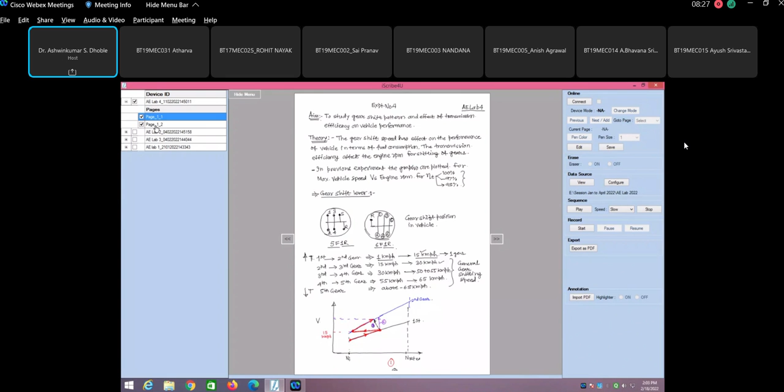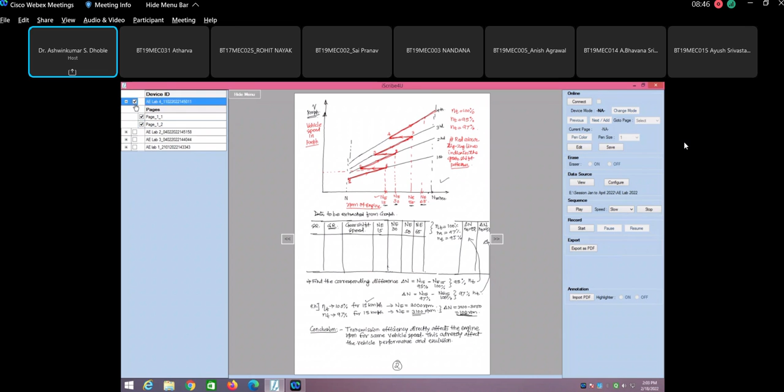So in the last practical we have seen the effect of transmission efficiency related to the engine RPM. There we found out what is that delta NE, which I asked you to calculate. This delta NE for 95% is more compared to 97%. That means that much amount of additional RPM we have to run the vehicle to get the speed we desire.

So now today's practical is based upon complete machine design. So have you studied machine design by any chance? Have you studied shaft design, experiment number 5? Yes sir, we have studied it. Very good, because that knowledge is going to be required here for designing the shaft.

So here we are going to design today's AE Lab 5, experiment number 5. The aim of the experiment is to design the input, to design the gearbox input shaft. So we have to design, let us say, if we see the theory...

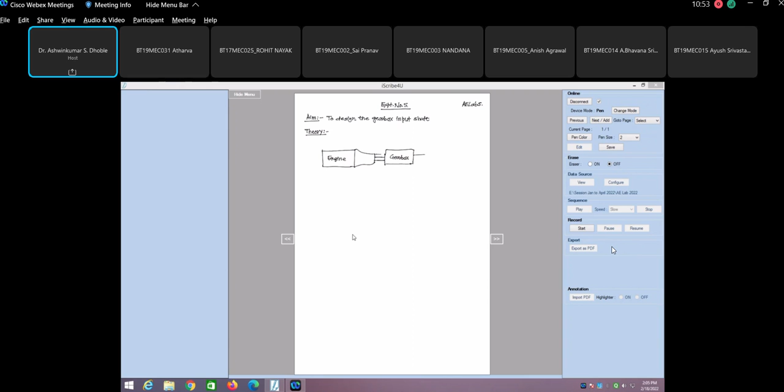We know that we are going to have the engine here. So this is the engine. Now this is the clutch housing, and this is connected to the gearbox. From the gearbox this can go to the propeller, then propeller to differential, and differential to wheel. So this is basically the gearbox input shaft. We have to determine the size of this. This is called the clutch housing. This is differential, this is propeller shaft.

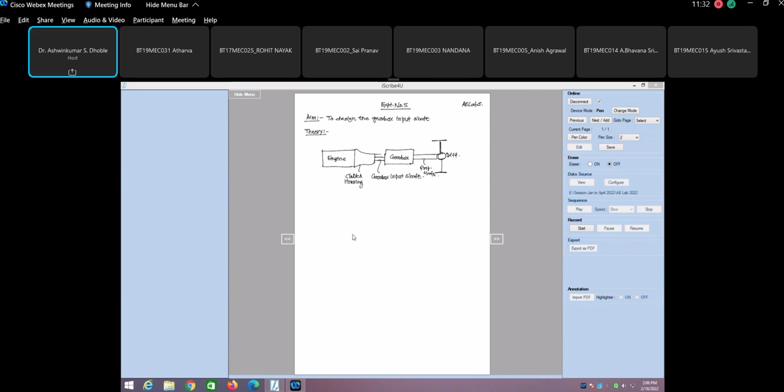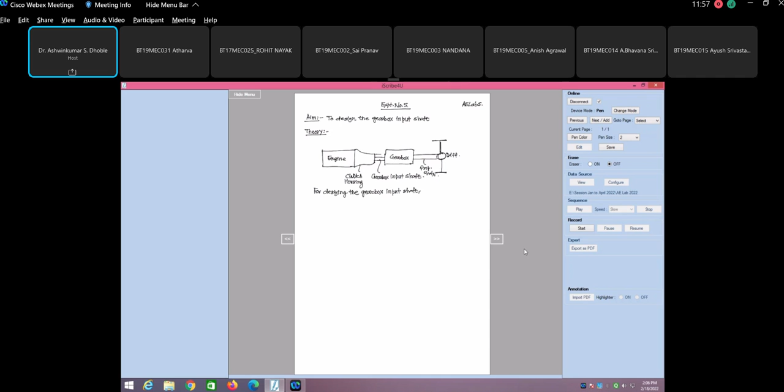For this we will require the engine characteristics. What is the engine characteristics? For designing the gearbox input shaft, we plot engine characteristics. These engine characteristics are given, or you have already studied this, where this is your engine RPM and let us say this is the power.

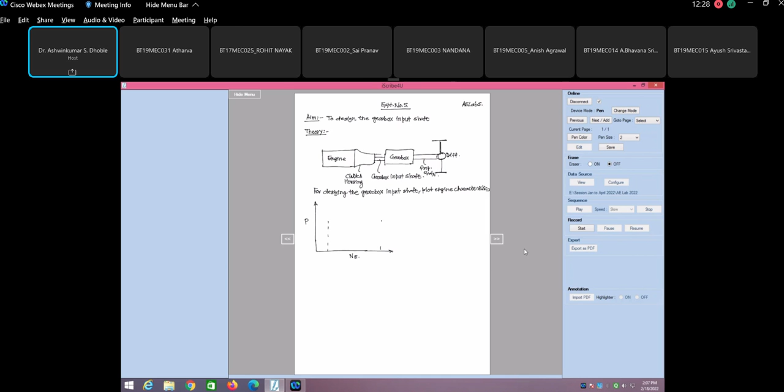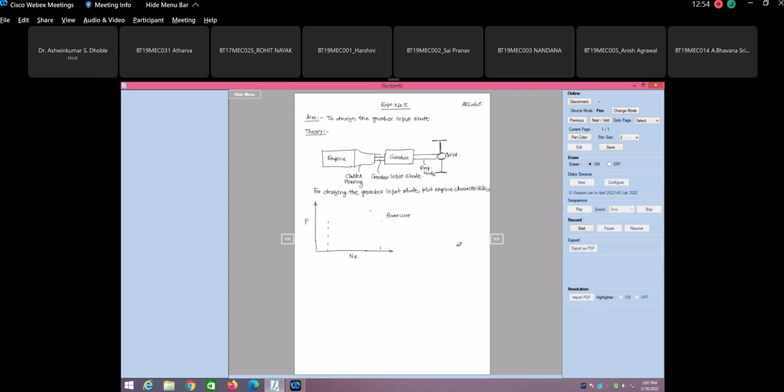So if you see the power curve, it is going to be like this, and this is the power curve. This portion is relatively flat. Rather I will just cut it here a little bit, okay. So this is your... this is the rated RPM. Okay, and this is the idle RPM.

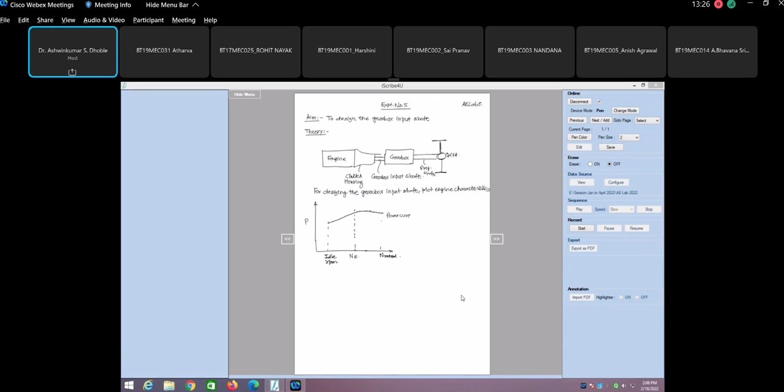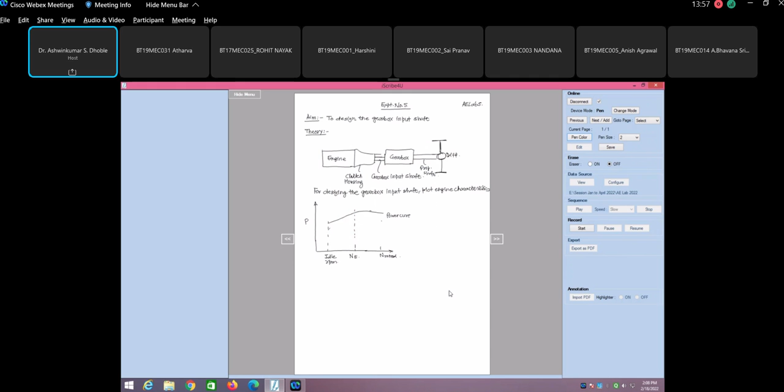Now if you see the torque curve, it is almost like this, that the torque curve will reach this peak value and then it will move down. It disappeared, one minute sir, let me redraw the torque curve. Okay, I will use this color. So the torque curve, if you see, it will be like this, and this point, this torque, this is the T max point.

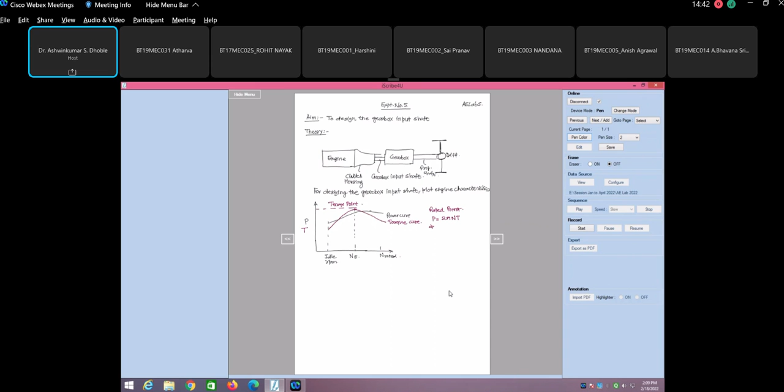Okay, so now if you know the rated power, power is equals to 2 pi N T. So from here you can find out, since rated power is known, you can find out the torque. Let us say that this torque is T1. So this is one way of finding the torque.

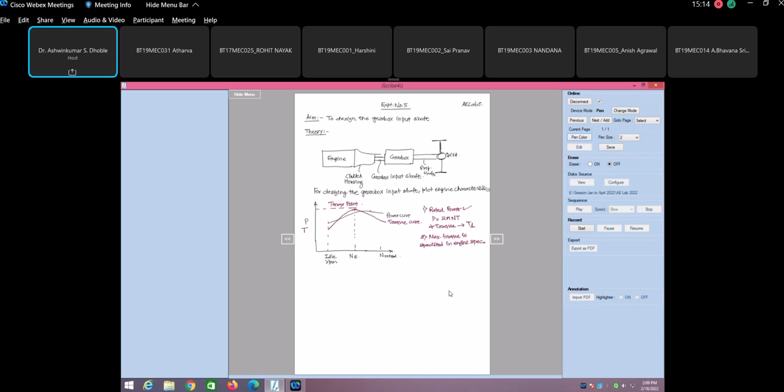The other way of finding the torque is the maximum torque specified in engine specs. Let us say if you are considering the design of I-20, then the maximum torque and maximum power at which RPM is specified. So one torque you get from the maximum or rated power, the other one is max torque.

So this is from engine specification, let us say this is T2. Then take maximum of T1 and T2, whichever is maximum you can take that, and then for this particular torque, the design torque TD, you can take it as 25% more, 1.25 into T max, either T1 or T2. This I will not tell you, you have to find out which one is more, T1 or T2.

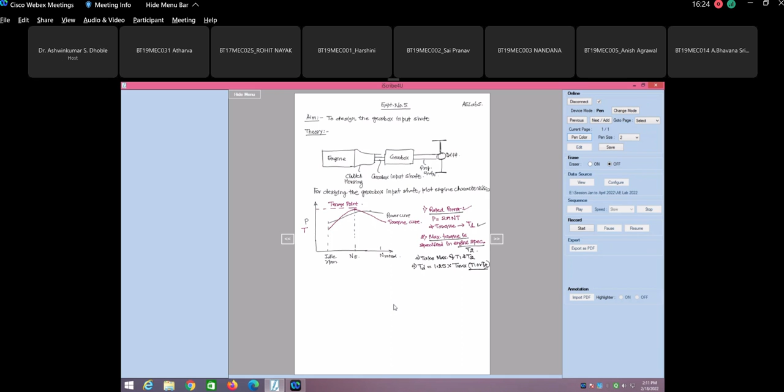Is this clear up till here? Is there any problem for anyone? Otherwise, is it clear whatever we have discussed up till now? Because then only the machine design part will start.

Okay, so now the shaft design can be done by two approaches. So which one is good now, that you have to decide. You have studied this. The first approach is approach 1.

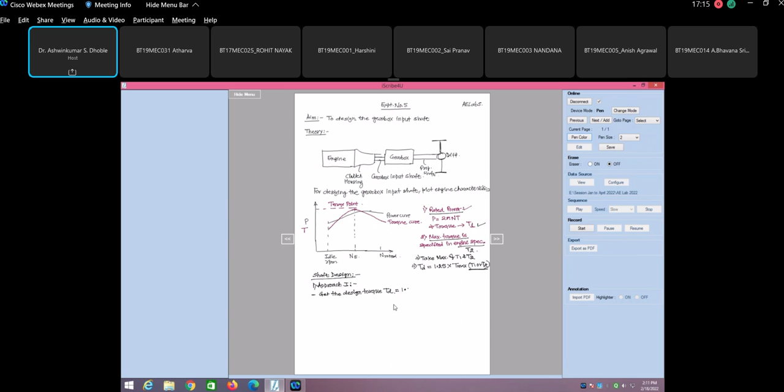So you know that the design torque TD is equal to 1.25 times the torque to be transmitted. Torque to be transmitted means either of these two, T1 or T2.

Okay, so now let us say that Fs is the permissible shear stress for shaft material. Where from do you get this? The step is select shaft material from data book and get the value.

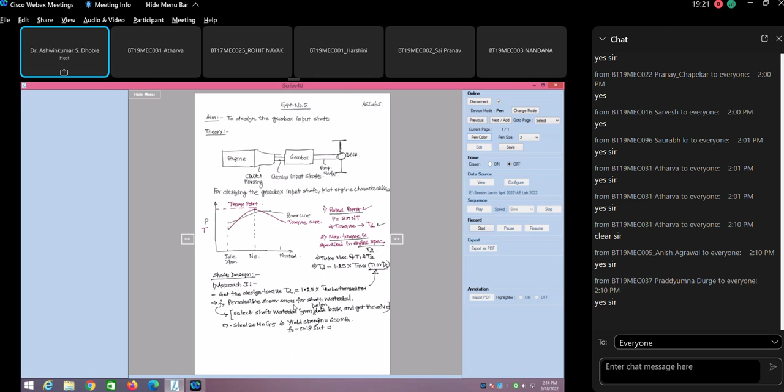20 Mn Chromium 5, whose yield strength is 650 megapascal. So Fs comes out to be 0.18 times SUT, ultimate stress. So that comes out to be 117 megapascal. You can take this, I'm just giving you the example.

Now the moment you select this, then use the formula: design torque TD by IP is equals to Fs divided by Y, where Y is the distance from neutral axis to outermost fiber of the shaft. So Y is the distance of neutral axis from the outermost fiber of the shaft, that is equals to D by 2.

And IP is your polar moment of inertia. This is equals to pi by 32 into d raised to power 4.

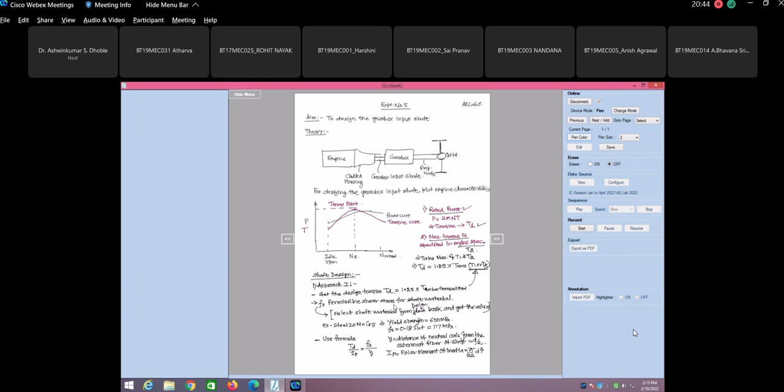So now you have almost all the values. So from here, get the diameter of shaft. Let us say that the diameter of shaft you get from this first approach is your D1.

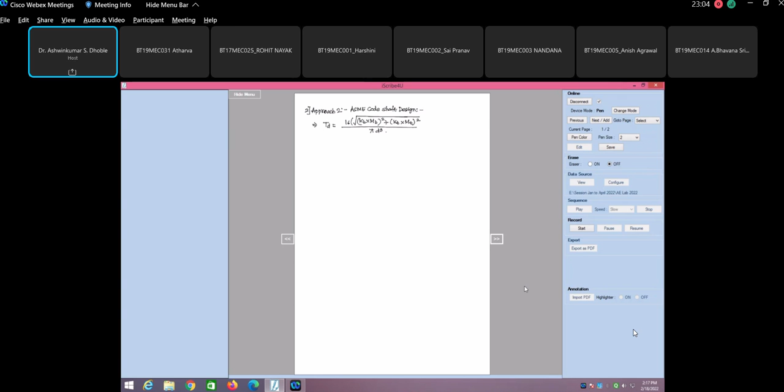One minute. It's saying that this has to be Tmax, I wrote it wrong. So Tmax is the maximum permissible shear stress, MB is maximum bending moment, MT is the maximum torque. Okay, this is equal to T design.

Okay, and KB and KT are fatigue and shock factor. KT is the shock factor.

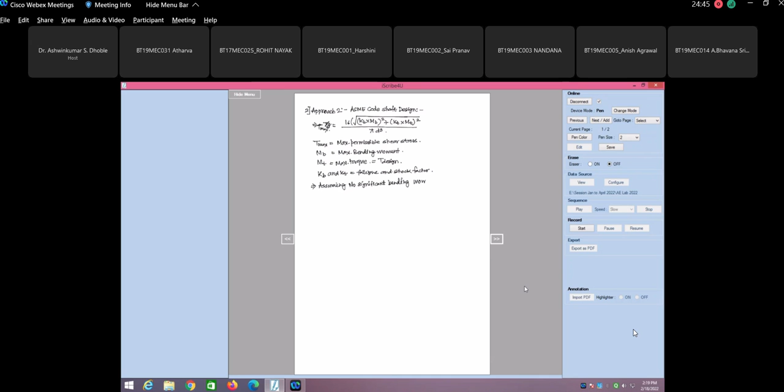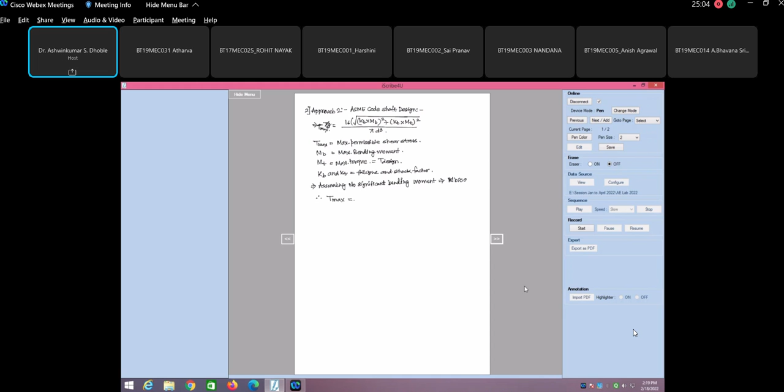So here, please note that assuming no significant bending moment, so make MB almost equal to 0. So in that case, your Tmax comes out to be Tmax is equal to 16 into KT into MT divided by pi d cube.

Take KT is equals to 1.25, this is for suddenly applied load, suddenly applied load with minor shocks. You can take this value for KT.

From here, get the value of diameter of shaft as D2.

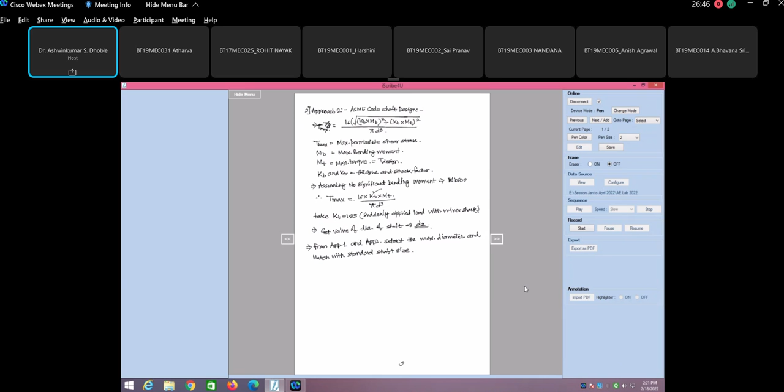Okay, so now from approach 1 and approach 2, select the maximum diameter and match with standard shaft size. Okay, so this is how you can design the diameter of the input diameter of the gearbox shaft.

Okay, so here one thing you have to remember, this is basically based on whatever things which are available, but we are taking the values from the actual specification. So this is the only way for designing the shaft.

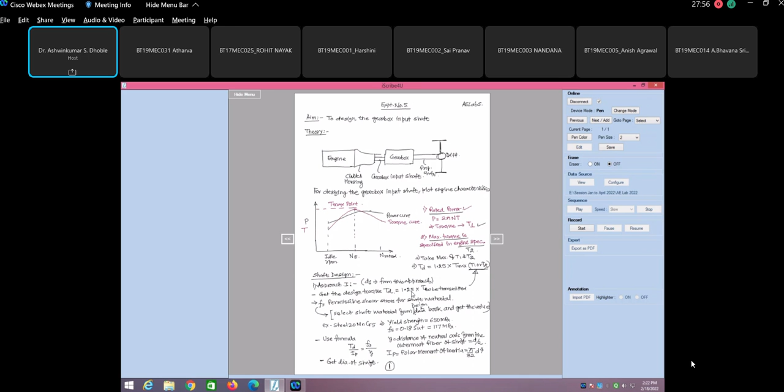If possible, try to get the diameter of the input shaft of the gearbox used in your specific model. Search online and try to match the size of this diameter. You won't get an exact match because we don't know what factor of safety they used, but in this case we have modified the maximum torque by 25%, so we are using a factor of safety of 1.25. Our shaft size from the calculation will be more than what is used in the automobile.

In the automobile, the factor of safety is usually of the order of 1.12. Only a 12% margin is provided, because if you use a higher factor of safety, you are unnecessarily making things heavy. Second, cost is a very sensitive issue in the automotive industry, so cost will increase. That is the major issue as far as automotive industries are concerned.

So usually the factor of safety used in industry is almost 1.12, that is 12% more value for designing. That means if you have a load of 100, they will consider it as 112 as the load and design for that.

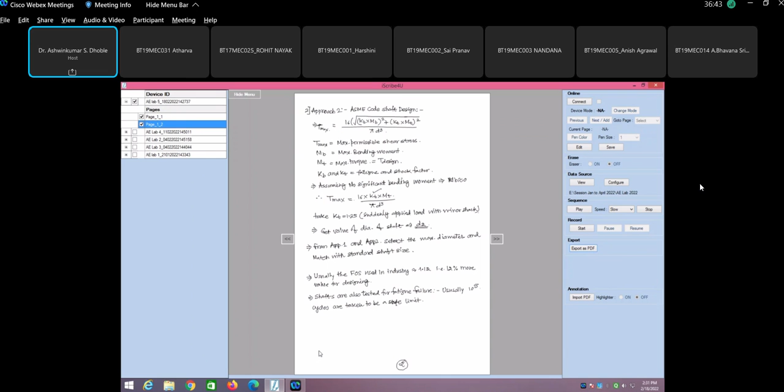But when we came back, whatever material we selected for the new engine, I won't disclose the name, that material was cheaper. Our boss told us why can't we do this exercise for all other engines, so we could have the crankshaft material we got for the new engine, because it was cheaper. So we did the fatigue testing of the entire platform, and that material for the new engine was costing only 9 rupees per kg, whereas in old engines it was costing almost 10 rupees per kg. So imagine 4 crankshafts, 4 connecting rods with same weight, reduced cost of 1 rupee. That means on one engine we had a saving of 4 rupees. With company taxation and everything, it comes to 10 to 12 rupees.

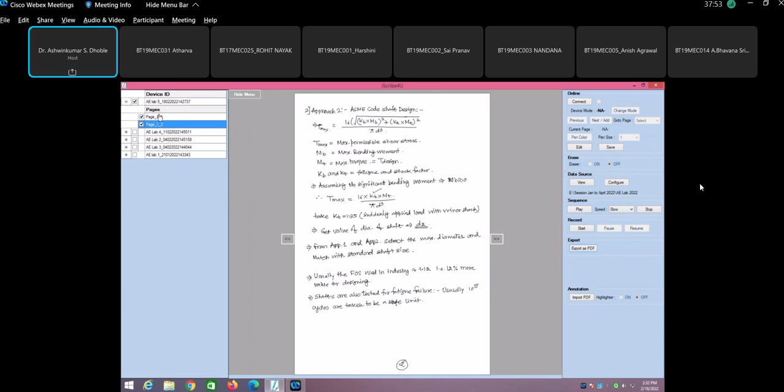So 10 to 12 rupees saving on each engine. Imagine the number of engines manufactured per day, per week, per month, per year, and for 10 years together. These are called value engineering projects, and we estimated that we did it for almost 3 engines, and could save almost more than 1.5 crores. That year we got excellent ratings for saving more than 1.5 crores. That means we gave the company more benefit than our entire salary put together. So this is basically the power of engineering. This is what I wanted to share, and this exercise I actually did, it's not that I'm telling you something I haven't done myself.

So likewise, if you are good in technical calculations, it's better to go ahead with that. So that's all from my side, if you have any query, any doubt, please ask.